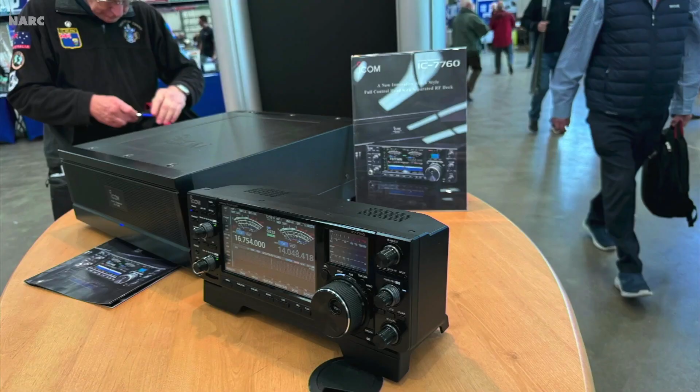And this was a radio that was there, which is one of a few launches there, but this was a major one. This is the IC-7760, which is ICOM's new flagship radio. It looks really nice. It's nearly £6,000, I think it's going to be. What was staggering, though, is this display unit near you is a remote head, so you can put that on your bench without taking much space. But that's fairly big. It's bigger than, say, an IC-705 or a 7300.

But look at the brute of the box next to it. That's got all of the radio gear in it. So it's let them have the freedom, I guess, to put loads and loads of electronics in. So if pounds per kilo of electronics is what you go by, it looks like you're going to get your money's worth there. But that was one of the brand new radios on show at the Hamfest.

And one other picture we'd like to show you. We didn't take this picture. And this is for Bob G7JTZ, on behalf of Paul G3VPT, because he's always having a go at him. And have a look at this. It just all got too much for some people, didn't it?

Oh dear. Is Bob not going to talk to us now? No, probably not. We had to show that picture, Bob, though, because you do send similar pictures of your friend Paul. And anyway, there's a picture of me taken the other day, a sneaky picture of me asleep, so why shouldn't you? Shouldn't just be me for that.

All right, Tammy, show us some little people.

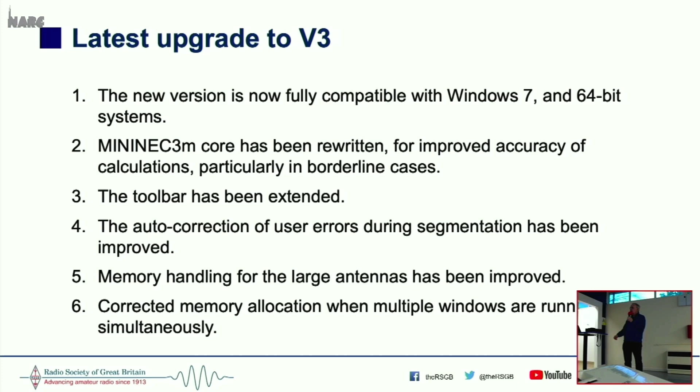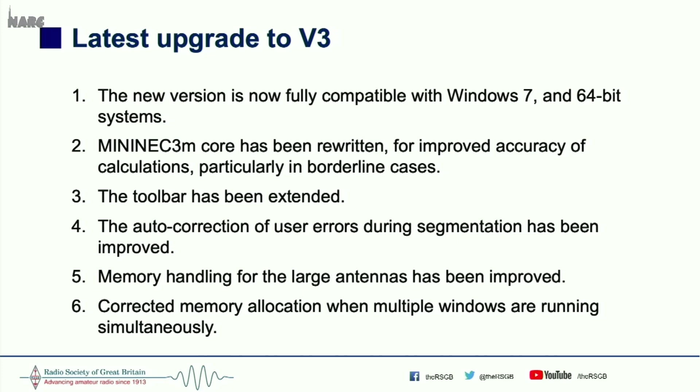As I said, the biggest change I noticed, I've been playing with it the last couple of days, is that you get color graphics of the radiation patterns, which are quite pretty. But there we go. Okay. So this is what's new. This is actually what's new in version 3.

So they've increased the number of segments. Now, what's the segments? Well, this works by breaking up the wires into little segments and then applying the RF to each segment, working out what the individual field is like from that segment, and then adding them all up. That's an easy way of saying what it does. It's a very complicated way of doing it, as we'll see in a minute.

But they've increased the number it can handle up to 10,000, which is way more than enough, and the number of wires. That is the number of elements to your antenna. They don't have to be wires. It could be aluminium if you want. That's been increased to 600.

And the number of sources. The source is like if you're applying your radio to a particular point, we call that a source. They've increased that to 100. I've never ever used more than one source, so quite why you need 100, I don't know, but there we go. And you can see the other elements that are in there as well. But it's an easy program to learn to use if you get your head around it.

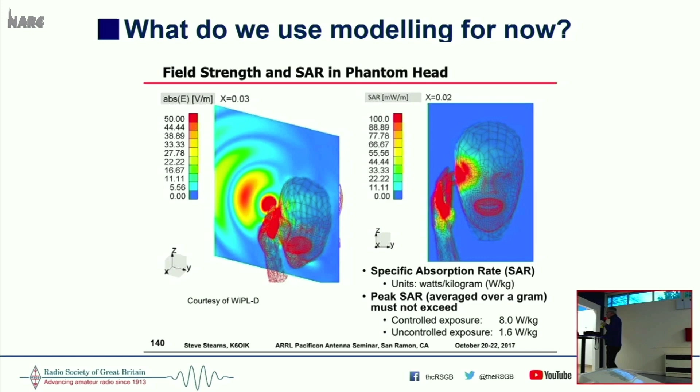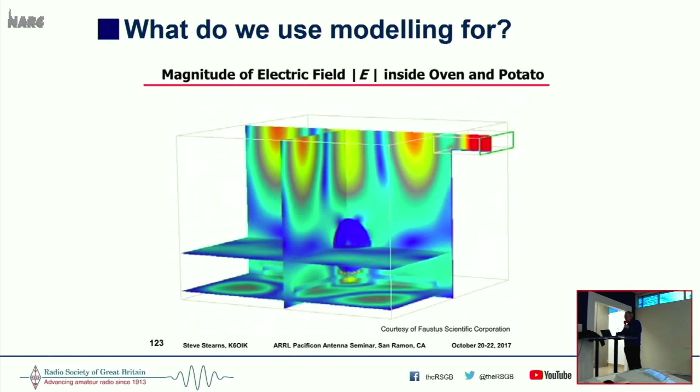Or you want a more practical example. This is the magnitude of the electric field inside a microwave oven with a potato. And so what did the modelling result in? Well, it found that the potato cooks unevenly, the bottom cooks faster than the top, and there's a centre hotspot due to focusing in the microwave. And you can see on the left-hand pattern there why your food doesn't cook evenly unless it's rotating, because you've got all these hotspots.

And if you don't believe me, break an egg into a microwave, then run it and see whether you get that kind of pattern. You probably will, unless you put it on a rotating dish. That was the trick for the microwave oven, to put a rotating plate in it. Otherwise, this is the sort of thing that happened. Anyway, we're not interested in microwave ovens. We're talking about antennas. So what do we need to know?

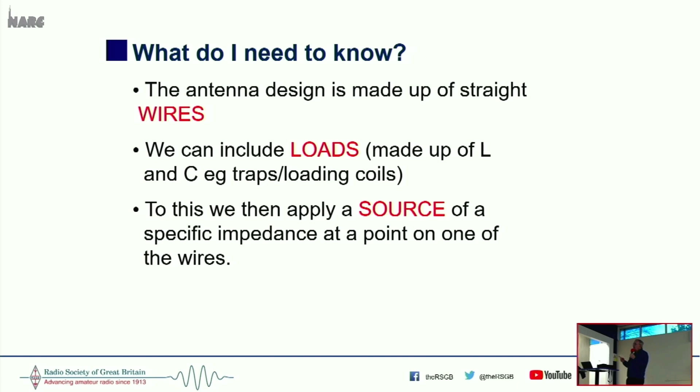Well, the three things you really need to know to deal with MMANA-GAL, just three things. That the antenna design is made up of straight wires. We use the term wires. They could be aluminium elements, but they're called wires. We also need to think about loads, which are traps, loading coils, made up of L and C components, so that's inductance and capacitance. And then we apply a source of a specific impedance at one point on one of the wires. So you need to know wires, loads, and source. They're the three things you need to know.

So then, if we move on to MMANA-GAL itself, we can see how that works. So this is a 20-meter dipole, and you'll see we've got wires at the top, source down on the left, and loads on the right. So in this particular instance, we've got no load being used, there's no coils or capacitors, and we've got just one wire, which goes from minus 5.17 meters to 5.17 meters. So it's 10 meters long, so it's a half-wave dipole on 20 meters.

And then the sources, see where it says pulse, it says W1C, that means wire 1 center. And this is the way we use it. We say W, then the wire, and then you can put beginning, center, or end. So W1B would be apply the source at the beginning of W1, wire 1. W1E would be put it at the end. But we've got W1C, which is put the source in the middle of wire 1. Okay, and you can see also there we've got a frequency that we're aiming at of 14.05 megahertz.

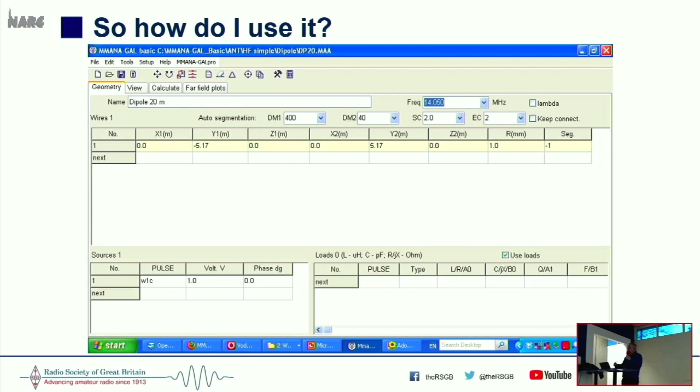Once you start to use this, it makes more sense. But this is why I think get it right from the outset, is that we use wires, and you can put as many wires as you want. And we have a source that we apply to the wires, and then capacitance and inductance, i.e. loads, we can also put that there as well.

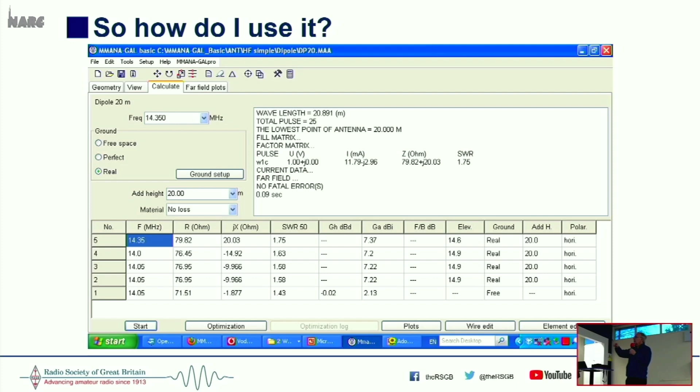And then you just press the start button, and it will come up with a line. Take the top one there, line number 5. Every time you press the start button, it will generate a new line. So if you go and make an adjustment to the antenna and press start, you'll get a new line. So you can see it's adjusted for 14.35 megahertz. We've got an SWR of 1.75 to 1. And it's at 20 meters. So, right, okay, that's good.

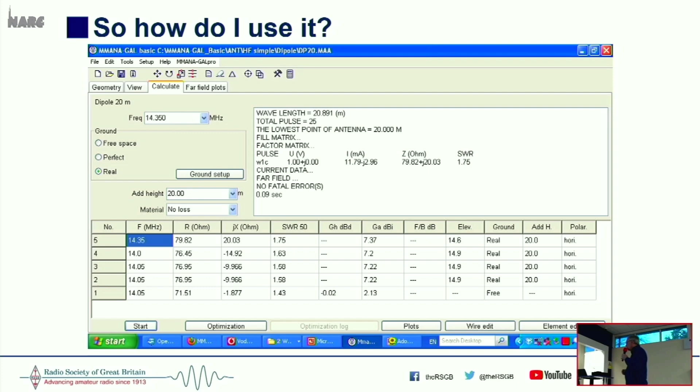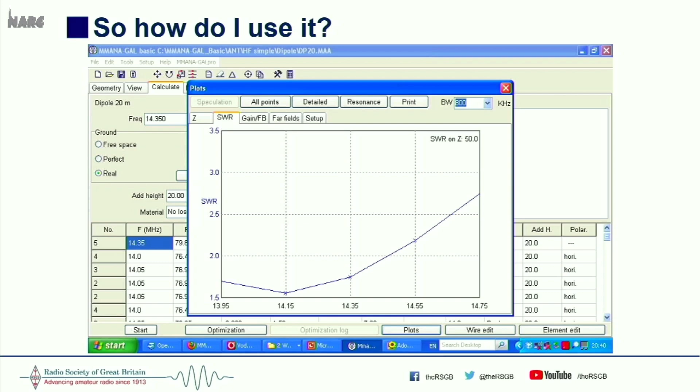So now we can go to the next tab, which is far field plots. Oh, no, before we go there, I just want to show you something else. You can actually then go to plots on that screen and say, right, just graph me the SWR plot or the impedance plot or the gain plot. And so you get the typical sort of SWR curve that you would expect to see. So you can see that the lowest SWR is at 14.15. So it's great. So we haven't had to cut any wire at all yet. We haven't had to go out in the rain. We haven't had to get freezing cold. We've done it all on a computer, which is good.

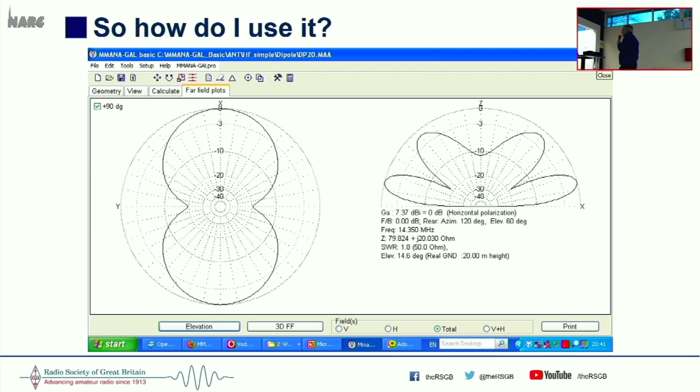And then we can go to the 3D view. And as I said, in version 3 now, this is in color, we'll see that later, but you can have a look at 3D, and you can rotate this around and have a look to see what you want. So you get a great idea of how this antenna is going to work before you even commit yourself to cutting wire. Oh, and you can adjust this so you can look at the vertical polarization elements, or the horizontal polarization elements, or you can look at the total field, which is what we're looking at there.

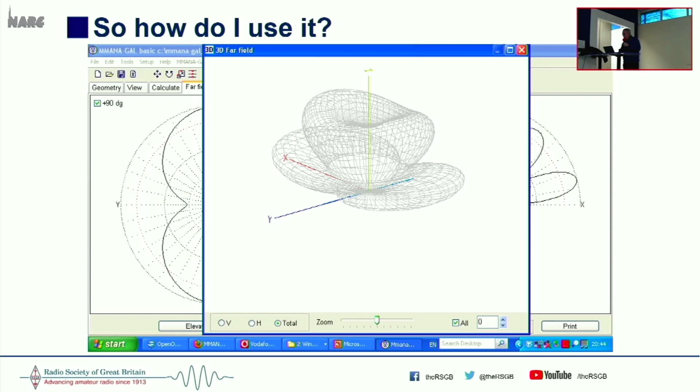So what about a typical example? Well, Roger, some time ago, had a rhombic antenna, a massive thing. I remember going to Roger's and saying, oh, it looks like your neighbours are hams as well. He said, no, that's my tower. It was just way, way over in the next field. I don't know if he's still got it, has he? No, I think it's taken down.

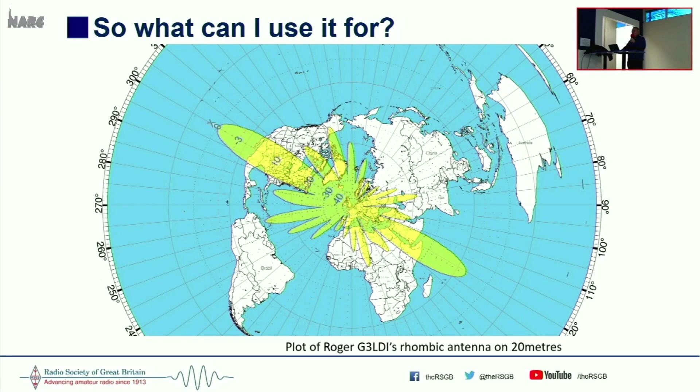So as a rhombic, excellent antenna, fantastic antenna, but only in two directions. Not very good for working Australia at all. Not for working New Zealand either. But if you want to work central US, it was absolutely fine. That's the sort of thing you can do with it. So let's have a look at some other antennas and see what MMANA-GAL tells us about them.

Now this is a G5RV. Does everyone know what a G5RV is? Yeah, very classic starter antenna really for HF. And everyone raves about them. Oh, I've got a G5RV, it's fantastic. Okay, well, what does this tell us? If you design and run a G5RV through MMANA-GAL, you find a few things. You see that it's got fairly low SWR on 20 meters, which is the band it's actually designed for. At 12 meters as well, it's below 3 to 1. If you look at 10 meters, it's 52 to 1.

And even on 10 megahertz, 30 meters, it's 34 to 1. So it's not really a multi-band antenna, not a particularly good one. And anyone who's played with G5RVs will know that they're not brilliant performers on some bands, and in some bands you're going to cause problems. I managed to burn an ATU out trying to run one of these on 10 meters once. Well, this shows you why.

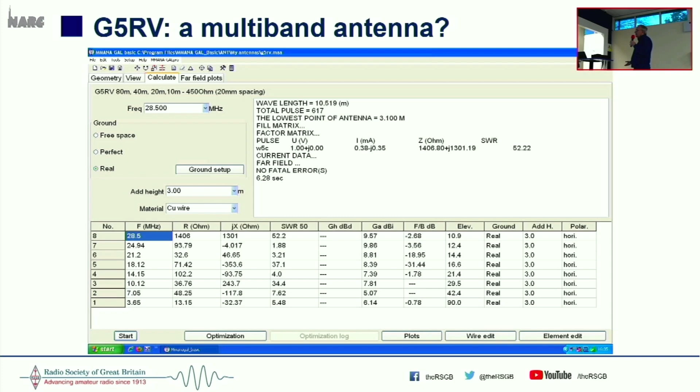But if you didn't model it and you just put the G5RV up, you'd never know. But this will let you play with things, as I said, before you actually start building them to see whether it works or not. And I think that the conclusion there is the G5RV is not really a very good multi-band antenna.

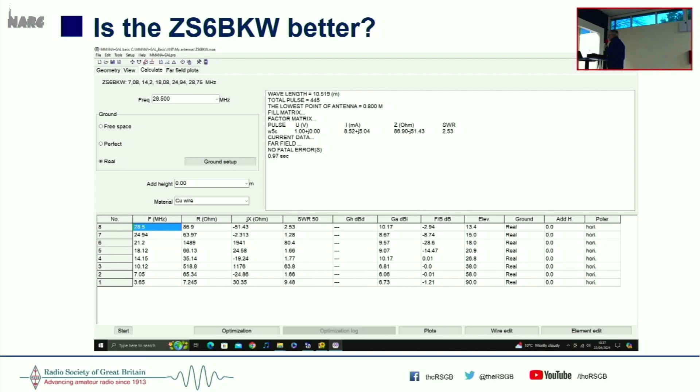So if we put that in a little table, you can see how they compare. So it's much better on 40, 20, 17, 12 and 10 meters. Better than a G5RV. And it's actually slightly shorter, but I think it's about another 15, 20 feet on the 300 ohm cable that goes to it. But there we go. That's MMANA-GAL and what you can do with it.

Right, what about the W3DZZ, which is a trap dipole? These are always being described as multi-band antennas, but in fact, if you do run them through MMANA-GAL, you find that you've got a low SWR on 80 and 40, which is what it's designed for. Low SWR on 15 meters, 2.4 to 1. But everywhere else, it's not good at all. 11.3 to 1 on 10 meters, 35 to 1 on, is that 28 megs? Yeah, 35 to 1 there. I think it's meant to say 24 megs actually. 14 megs is not brilliant. So again, it's not really a good multi-band antenna.

And I've played with this. I've tried different loading coils, different values of the capacitor in the loading coils, trying to find a combination that would give you low SWRs on all the bands, and basically gave up in the end. So the W3DZZ trap dipole works very well on 80 and 40, and then by design it kind of works quite well on 15 meters as well. But the rest of the bands, no, not good at all.

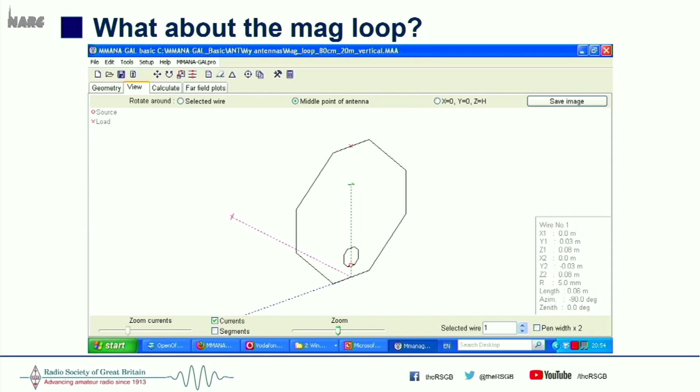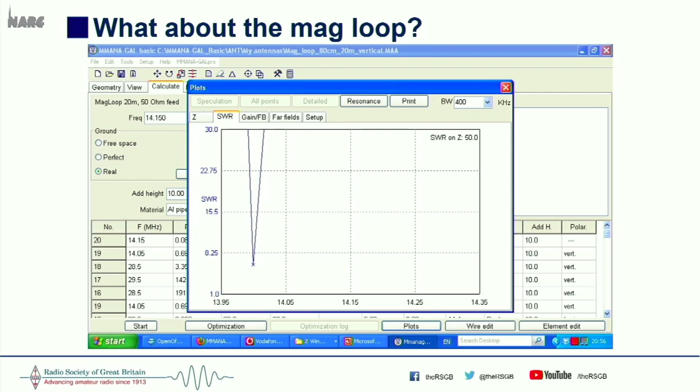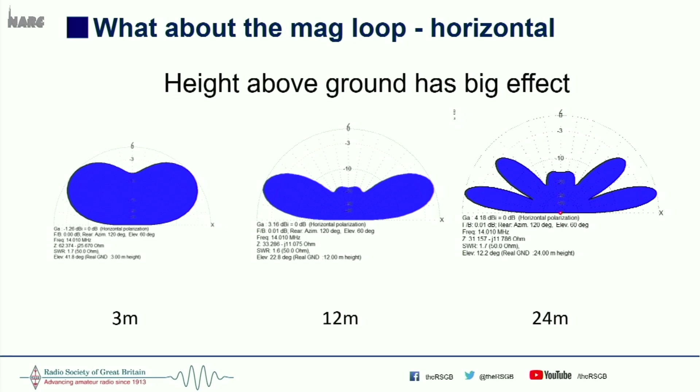It's not a good idea to have a magnetic loop horizontal unless you can get it at a fair height. And by fair height, I mean at least 10, 12 meters above ground. So again, we haven't had to do anything, but MMANA-GAL tells us that that's the case. So they recommend that with small magnetic loops you put them vertical. So what about if we have it vertical then?

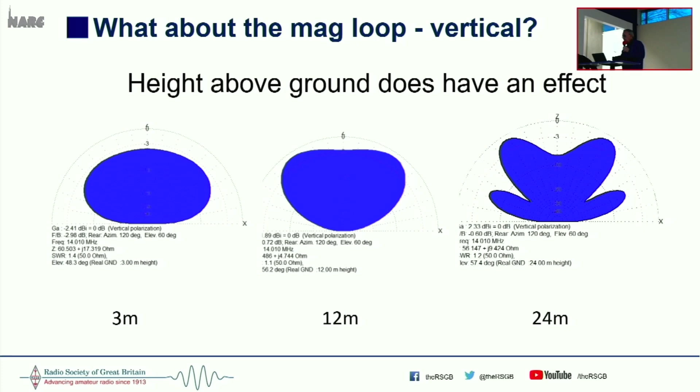I love it when you press a button and nothing works. There we go.

So this shows you what I did this week. This is in MMANA-GAL 3. So now we've got these coloured radiation patterns. You can see the hotter the colour, the more radiation there is coming off it. You can just about see the green loop in there. So the radiation on a magnetic loop is in line with the loop. It's not off the sides, it's in line with the loop.

So if you're going to have one of these, it's best to have it, if you can, on a rotator, so you can point it at where you want to work. Failing that, you've got to align the loop so that it's actually aligned with the country you want to work. And then you've got radiation in two directions, but off the side you don't get quite so much. So that's a magnetic loop, vertical rather than being horizontal.

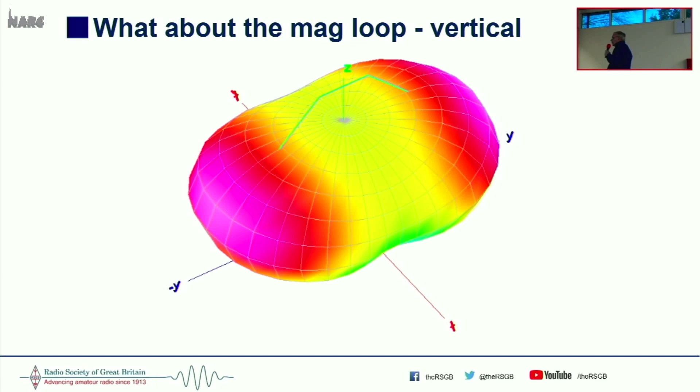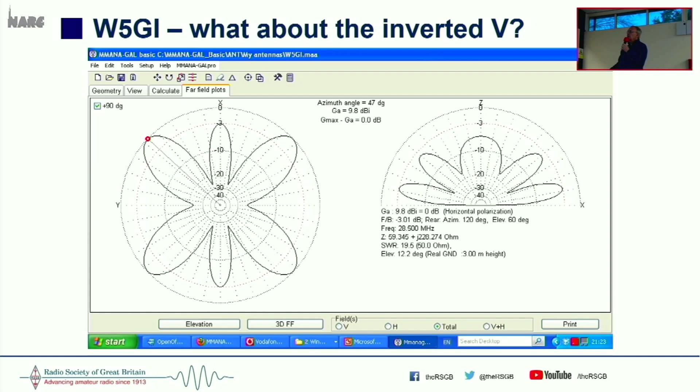Now, W5GI is what we're going to use at Caister on 40 meters on Saturday, and this is a plot of what a W5GI looks like if it's flat. But what about if you do it as an inverted V, which is the way we run it at Caister? Is that the sort of radiation pattern you get? Well, no, not really, because what happens is it squashes it down.

So instead of having that sort of butterfly type radiation pattern, you're now getting the black pattern, which isn't bad actually if you think about it. You're not getting those massive nulls. So if the station's in that null, you probably won't hear them, but now by making it an inverted V, you will. So looking at the pattern on the left, you can see the black area. It shows you that it's a much nicer pattern, more omnidirectional, if you like. There are no massive nulls there.

But if you look on the right-hand side, you can see that you're down probably about maybe 7 dBs on those bottom lobes there. But that's the trouble with antennas; they're all compromised. So what is it you want? Do you want the maximum radiation in certain directions, in which case don't put it up as an inverted V, put it up as a flat antenna, or do you want to put it up as an inverted V and have it as more omnidirectional, but you do lose some of the gain from the antenna.

So what's next? Microvert. This is an interesting little antenna. Has anyone come across the microvert? No? Google it. It's quite interesting. It's an antenna that's only about 1.5 feet long. It was designed by a German guy who has written all the instructions in German.

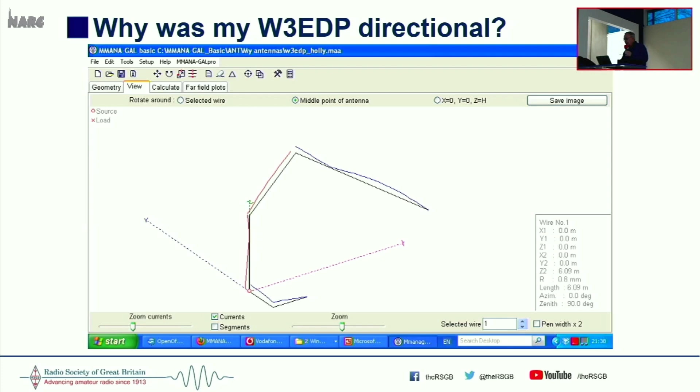But putting it in MMANA-GAL and playing with it shows you why. This is the radiation pattern for that W3EDP that I had. You'll see that there's quite a big radiation pattern to the south, southeast, southwest, and then a big null behind me to the north. And then there were a couple of little lobes out there to, what would it be, the northeast and northwest. But by far the biggest radiation for this antenna was to the southeast and southwest.

Also, it was pretty much a sky warmer as well. You can see this is on 20 meters, so not a terribly efficient antenna at all. It didn't last long before I took it down and tried something else. But this is what I mean. You can take your design and put it into this and go, oh right, that's not going to work. Or how do I have to arrange this antenna in my garden to work what I want to work?

Just because you've got two trees in the garden and you're going to string it between those two, fine, but you may find that your antenna doesn't work terribly well when you want to work America, say. You might be in a big null. So by doing this, you can at least see, right, okay, well that's not going to work, is it? So we have to play with it.

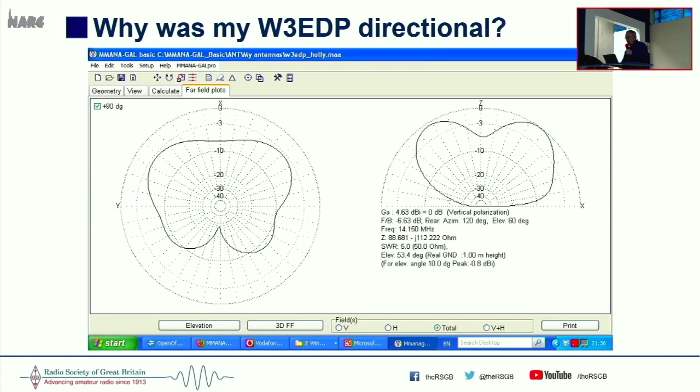And it's dead easy to put up, and that's one of the main reasons, because it'll probably be raining on Saturday. We've done it in rain, gales.

I don't think we've ever done it on a sunny day, have we? Well, we did, but oh yeah, I remember now. Yes, you got stuck in the... you don't want to be reminded of that. All right, the first time we did International Marconi Day, we had a problem. So you're going to use their flagpole. That was the arrangement. We're going to use the flagpole, so it's great. So he hooked it up to the flagpole, pulled the wire, and the flagpole broke in half because it was rotten. So, now what are we going to do?

So they had a cherry picker, didn't they? So David went up in the air on the cherry picker, and then what happened? I can't remember now. It stopped, didn't it? Yeah, it wouldn't come down again. So no. Yeah. They didn't have any sympathy, but Kevin was very quick to get his camera out and take pictures of it. So yeah, that is exactly what happened. And this was the first International Marconi Day we did. So great, we're going to use a flagpole, and that's just broken in half. And now we've got him up on the... So I did say we could hold the antenna above your head for the next 7 hours. You'll be fine.

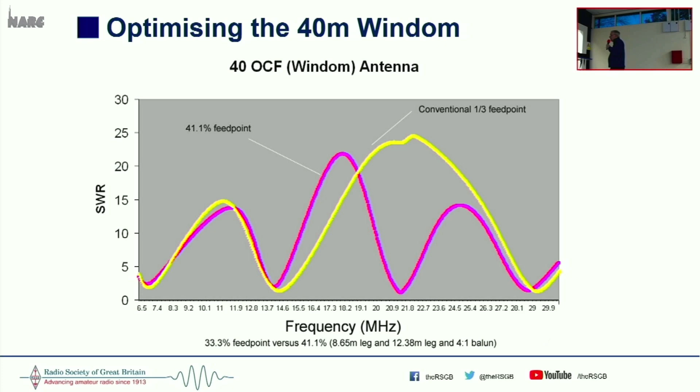So how could you change this antenna so that you can get more bands? Well, it's easy. You play with it on MMANA-GAL, and you find that if you feed it at the 41.1% feed point, now you've got it on 40, 20, 15, and 10. So by changing where you're feeding the off-center fed dipole, you can get more bands in. So that's another nice tip as well. That's worth knowing, because if you're building an antenna and you've only got room for one, by doing this, now you can go on 15 meters as well. So I think that's another good way of using an antenna analyzer.

And I did all the calculations, we worked it out, and we bought the 300 ohm ribbon cable. But when we put them all together, they were resonant on about 156 megahertz. And this is weird. I thought, well, why is that? Because I'd built some of them before. Originally we'd used the clear 300 ohm ribbon, with a translucent plastic. And then for the rest we bought some black stuff. Well, the velocity factor of that was totally different to the white stuff.

So it turns out that if you want to build one of these with white 300 ohm ribbon, then 59 inches is the length you need. But if you're using the black stuff, 53 inches is what you need. And likewise, the gap at the bottom, instead of 18 inches with the white 300 ohm ribbon, if you're using the black stuff, you use 16 inches. So again, you can play with these ideas to see what you can do, or how you adjust the thing to get it to work. So we ended up with these antennas that are on 156, and we had to, what did we do? Cut it longer or shorter? I can't remember now. To cut it to get it to 145 megs anyway, but there we go.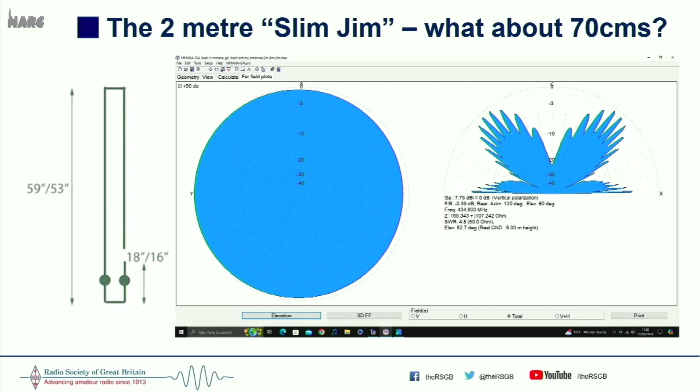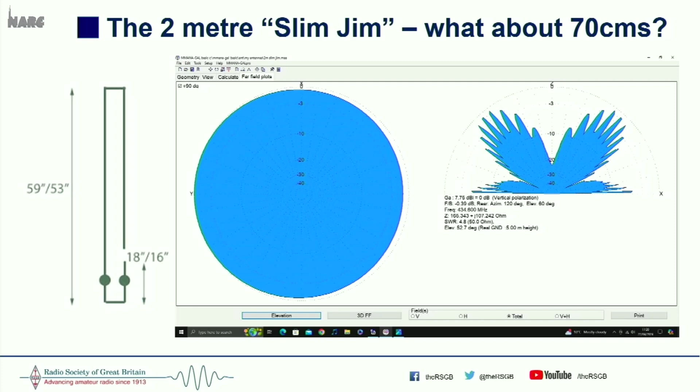So yes, with a 2 meter Slim Jim, you can use it on 70 centimeters. It won't be the most effective antenna in the world, because you are wasting some of your radiation going up and out of the way. Good if you're using satellites, I guess, but it will work on 70 centimeters. So one antenna means you can work on 2 bands, although don't expect miracles out of it, but it will work on 70 cms. And again, playing with this like this, you can actually play with it and go, oh, right, okay, that does work after all.

Right, so what are the pitfalls of using an antenna modeling program? Well, the software assumes your antenna has nothing around it. That is, if you've got, what should we say, metal greenhouses, well, not metal greenhouses, but metal framed greenhouses, that won't help. Loads of trees don't exactly help either. So it assumes you've got nothing around it, but of course, in real life, you do have things around it.

And if you've got too many antennas, Chris will tell you how you get interactions between them. You do. I remember we did a test one. Do you remember that? What was that damn thing we tried? Anyway, it didn't work terribly well, and we realised it's because there was an 80-metre dipole just above it, which screened it. Yep, we've tested so many things over the years.

Yeah. What about the earth conductivity and dielectric constant? Do you know what they are? It comes with some standard ones, but if you are on a beach, say, that will make a big difference. Salt water makes a massive difference. Salt water works very, very well, but I often read people saying, oh, I'm right next to the river, that will work better. Well, it doesn't actually. Fresh water is not that good, nowhere near as good as salt water. It's fantastic.

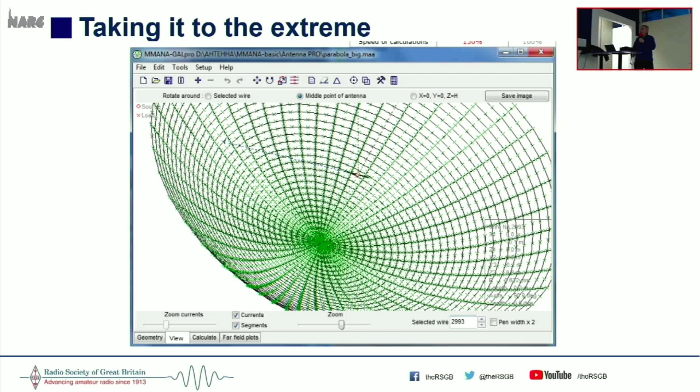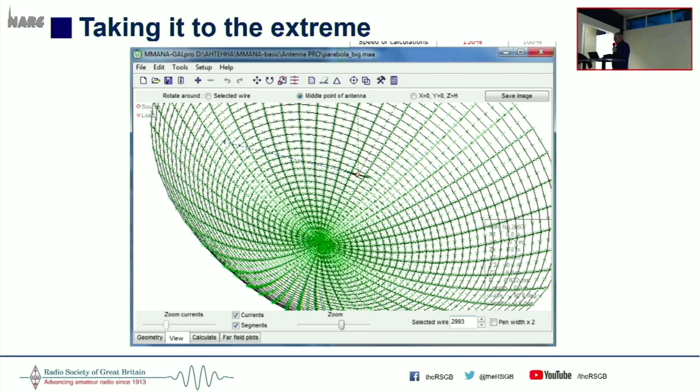This was a parabolic antenna that has been produced in MMANA-GAL Pro. I just dread to think about how long that took them to do that. But if that's the sort of thing you're trying to model, then yeah, you probably need a better program than MMANA-GAL Basic. But otherwise, MMANA-GAL itself is fine.

There's quick start tutorials on the web as well, and there are YouTube programs. I mean, the presentation I'm giving here, I've given this before. It's on YouTube as well. But DX Commander, you know, the guy who does the verticals, he has done a YouTube one on easy antenna modeling with MMANA-GAL.

A lot of people say to me, I just can't get my head around how to use it. Just break it down, start off with something simple like a dipole, and then work on that from there, and get to know how it works, and then you can start adding more elements to it or trying to work with beams. But there we go. And there are many more tutorials. If you just search for MMANA-GAL on the web, you'll find all sorts of things.

And then just penultimately now, just one thing. It's only a model. So no one got DXCC using MMANA-GAL. So, you know, you can model your antennas till you're blue in the face, but until you actually build them, you won't know how well they really work for you.

But I think it's a good tool to use. It's a good tool to get to know how to use, so you can at least play with it and see how things will work. If you've got a specific sized garden, you know, what's the best antenna for working America from my garden? Well, it may not be the one you think it is, but there we go.

They're all there. So, as I said, Google G0KYA, it's the Blogspot site. Just look on there and go to MMANA-GAL, and you'll find a link to download them as a zip file with about 20, I think, antenna definition files that you can play with.

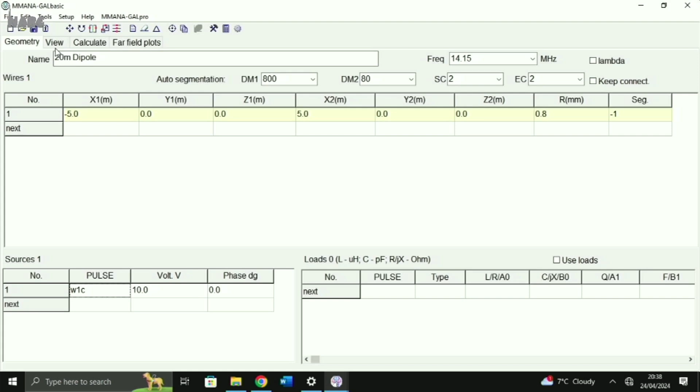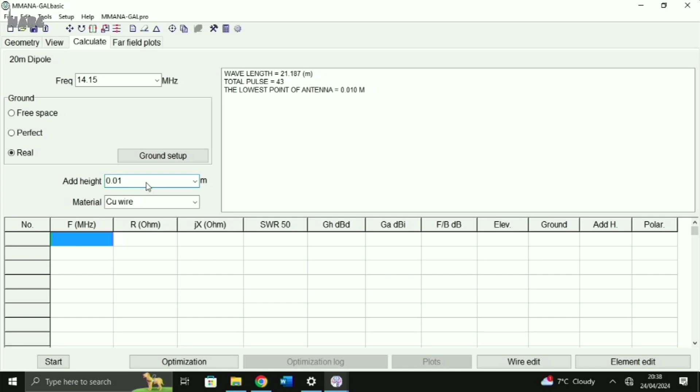So let's have a look what we've done. So there it is, and so you can see we've got the feed point, the source, as it were, in the middle, and you can rotate this around. So good. Let's have a look at calculate now. So material, we're going to make copper wire. There we go. And I'm going to put it at 10 meters. Good. And then run it. So there we go. We've got a 20 meter dipole, which I've only cut to 10 meters long, with an SWR of just under 3:1.

So if we look at plots now, say, okay, show me the SWR plot, details. There we go. So we can see that the antenna is actually resonant above 14 megs. So it's too short. Okay. So somebody was saying earlier, how can you use the optimization? Well, okay, let's have a look. So optimization, you basically decide what it is you're trying to optimize. So we want a lower SWR.

So I'm going to put that as one of our, just got to put the mic down actually. We're going to put that as the thing we want to do. Hold on. There we go. So the SWR is what we're trying to optimize. I'm not too bothered about the gain, front to back, or the elevation. So let's knock those down. Okay, and right. And we're going to do it on wire 1, which is, we have only got one wire, so that's it.

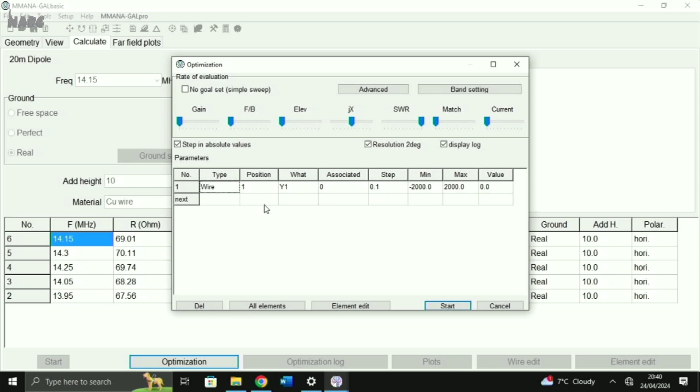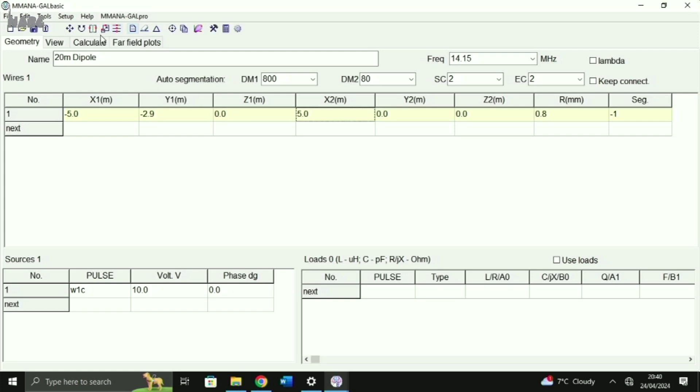So right, start. So now it will go away and it will play until it actually gets the lowest SWR it can on 14.15. So if we now look at the thing, you'll see that it's now, what is it now? It's now at 2.9. That shouldn't be like that. Okay. Let's have a look at the plots now. Detailed. There we go. So now you can see that that's the SWR plot we want. And so it's optimized it for SWR.

We can optimize for gain, you can optimize for impedance, you can optimize for what you want. Not the easiest way to do it, but it saves playing with a calculator. But obviously, if you were building this for home, out of PVC covered wire, I would take this length that it's calculated and I would multiply it by 0.95 to make it slightly shorter, and you'll find that that will probably be it, because it doesn't know that PVC coated wire has a lower velocity factor than copper wire.

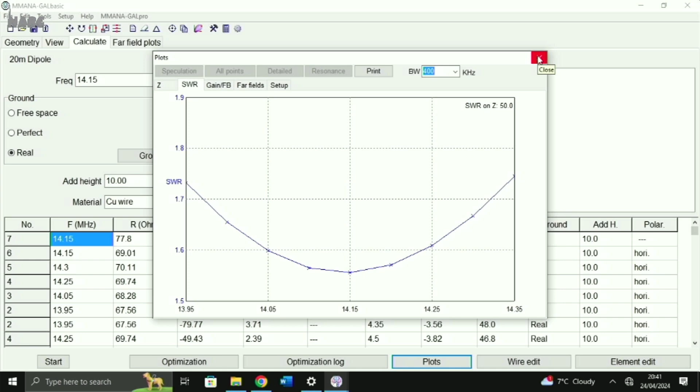But the more modern and more expensive versions of MMANA can do it, but it's not too bad if you just remember from the outset that that's the way you have to do it. So that's how you can optimize something. But it's got its limitations.

If you've got a 4-element beam and you want to optimize that for SWR, and you say, right, optimize element 1, element 2, element 3, element 4. So it can adjust the lengths of the beam and it can adjust the inter-element spacing. That's a lot of work to do. So maybe you'll find it will churn around forever and may not give you the right results. So I think optimization is best used for simple antennas, but anything more complex than that, you probably go around in circles trying to get it.

We tried this once. Roger wanted to know how we could get a better signal out for the 80-meter club championship. So we were looking at reflectors under the dipole, and worked out eventually that something about a foot off the ground and longer than the dipole would do it. But I don't think we ever tried it, to be honest, but it was the only way we could get it to have maximum gain or increase the gain in a north, skyward direction. So that's a basic antenna, a 20-meter dipole.

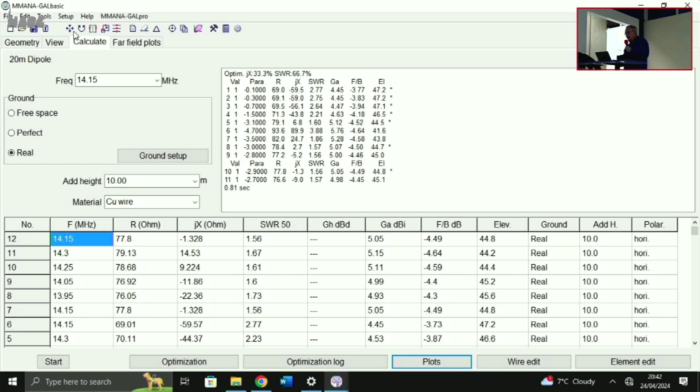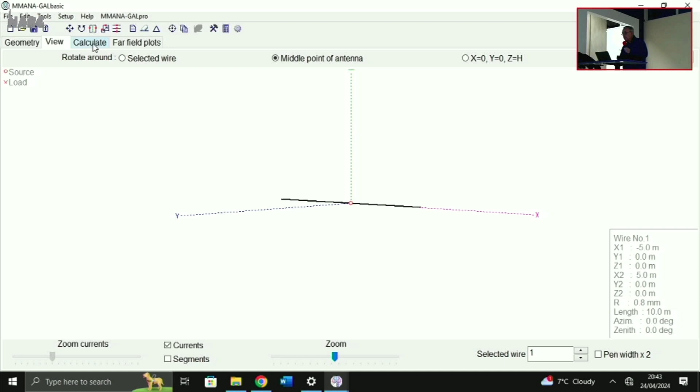So, let's have a look at the far field plots then. What do we see? There we go. So, at that kind of height, you'll see that. I'm just going to adjust this a bit because I don't think that should be 0. Silly thing. That's it. All right, run it. Yeah, hang on. Well, this is at 10 meters. So you'll notice that we've got quite a high lobe there, not terribly good. And this is 10 meters with real earth underneath it. So we're going to put it up to 20 meters now. And run it.

Interesting. So you'll see that if the antenna is running across there, its maximum radiation is still broadside to the antenna, absolutely. But not the sort of polar pattern you expected, I don't think, is it? Let's have a look in 3D, see what it looks like. So there we go. So this 20-meter dipole at 20 meters, you actually get 2 lobes coming out. So you've got a low angle lobe and you've got a high angle lobe as well. Probably didn't expect that, did you?

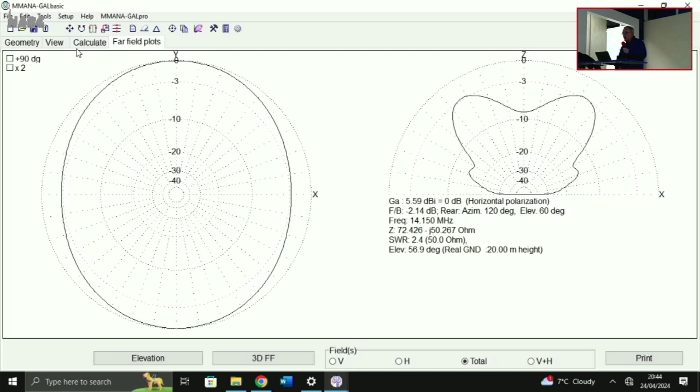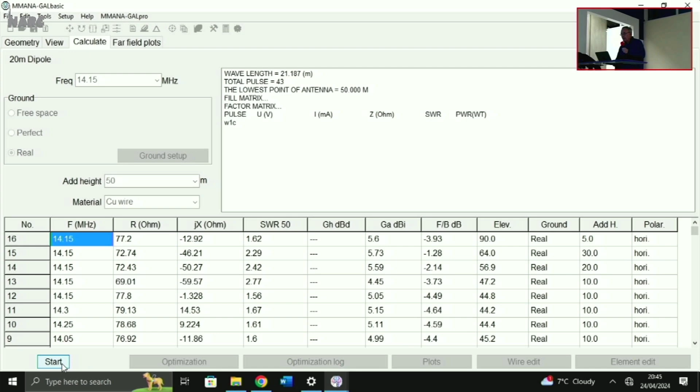Okay, so let's put it up higher, even more. Calculate. 30 meters, so we're getting up there now. Start. All right, far field. Oh, well, worse, yeah, great. Okay, let's put it down to 5 meters then. So it's a sky warmer now. So you can play with this to your heart's content. 50 meters. It's a lot easier than buying a house and a tower, I tell you. Right. Yeah, interesting, isn't it? So yeah, we can model anything.

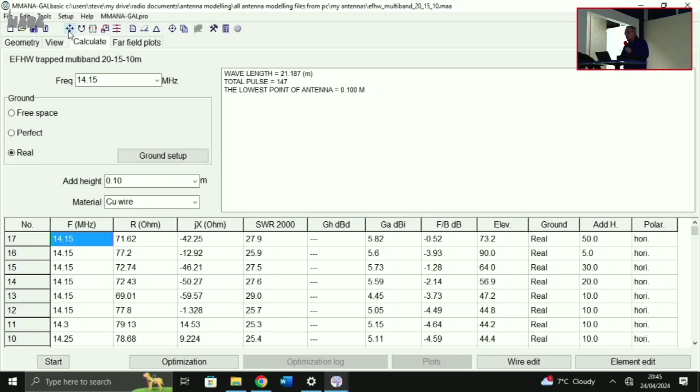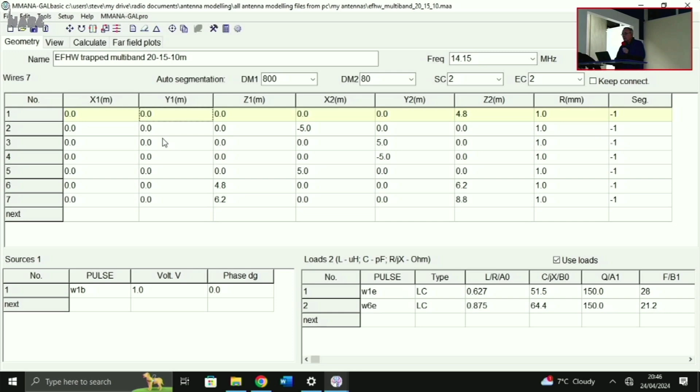So what have we got here? Something I've been playing with is an end-fed half-wave multiband. So this is an antenna with 2 traps in it. Now the traps are fairly easy to put in. You see we've got wire 1 at the end. We've got an LC trap there. So we've got 0.627, I think it's microhenries, and a 51 picofarad capacitor. So it's a trap with an LC element to it. And then we've got another trap on wire 6. So we end up with a vertical with 2 traps in it.

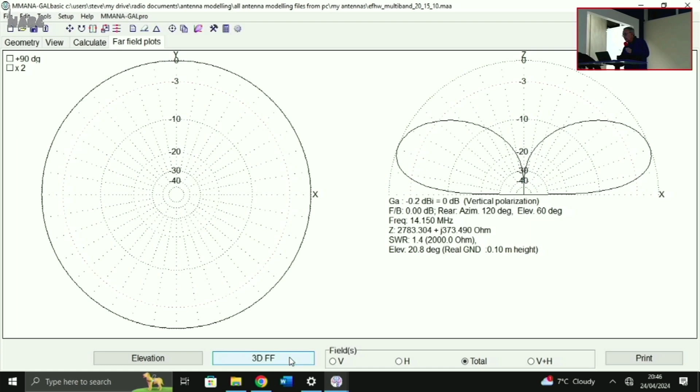And so we can play with that now, and there we go. Let's run it on 20 meters. So there we go. That's the sort of plot you get. So again, omnidirectional and fairly low radiation angle. There we are. So that's for 20 meters, and if we do it for 15 and 10, we get similar patterns. The only problem with this antenna design, and we may use it on Saturday, I'll see, is that unfortunately, if you have an antenna that's got a trap there and a trap there, obviously if we're running this on 20 meters, maximum radiation is right in the middle of that.

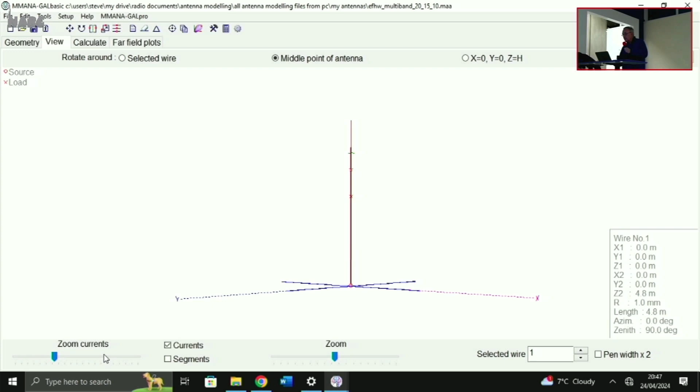Let's run it now, I'll show you. Maximum radiation is right where that trap is. I'll just put the currents up so you can see. There we go. So you can see the maximum radiation point is right where the trap is for 10 meters. So this is why it doesn't work terribly well on 10, I don't think.

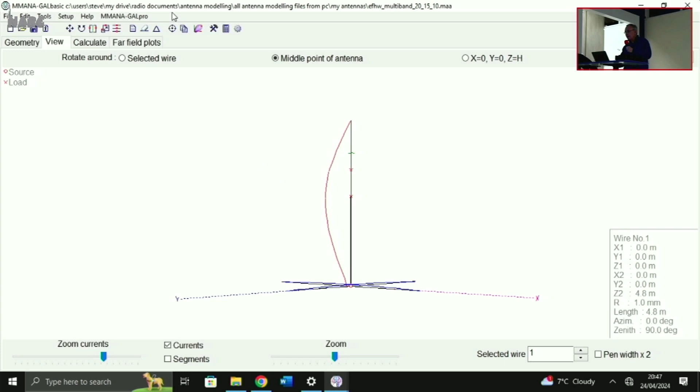But again, you can play with this and you start to see you can build a 3-band end-fed half-wave trapped vertical, but you've got to bear in mind what I just said, that a lot of the current is going to be in that trap. So it doesn't really help. But you do end up with an omnidirectional antenna with fairly low angle radiation. And I haven't had to build anything, so there we go. Yes?

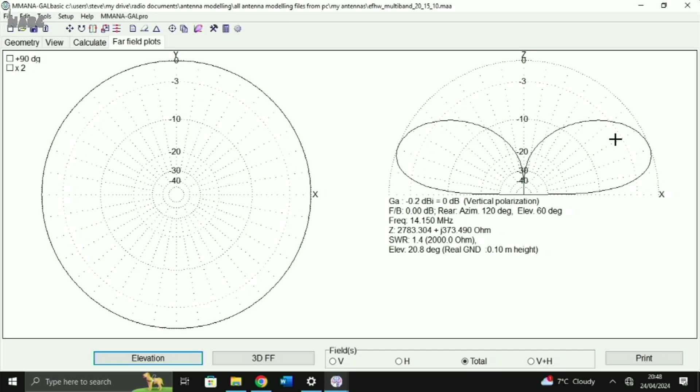I'm going to poke holes in it. The 10-metre trap at 20 metres ought to be almost invisible. You think so? Yeah. Well, that'd just be a little bit of a coil, wouldn't it? I mean, it'll be a coil, and at 10 metres it should be basically an open circuit. So all your current will be at the bottom. That's the problem with it. Well, because it'll only be a 2.5 metre tall antenna at the ground, won't it, at 10 metres?

No, we're not talking about quarter waves. We're talking about half waves. All right, half wave, it'll be 5 metres tall. Yeah, and there's the maximum current. That's on 20 metres, and there's the 10 metre trap, yes. So that should be almost invisible to the 20 metre signal, shouldn't it? I don't think so, if you think about it. Well, that's the whole point of it, isn't it?

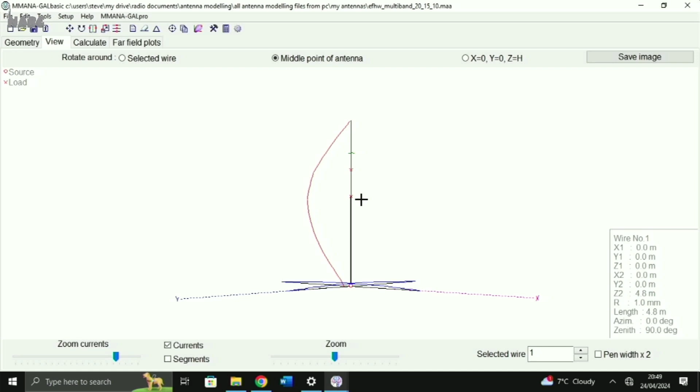Yeah, it's supposed to have very low impedance at 20 metres. Yeah, but it's still current going through a coil. Oh, there is current going through it. So it's current going through a coil. Well, that's why you got that little kink in the... Yeah, I think I can see a kink. Should have brought my glasses. Anyway, so if you do the plot for 10 metres, that should stop there, shouldn't it? Yeah, 10 metres isn't so bad, but it's just not very far off the ground. There we go. 28.5.

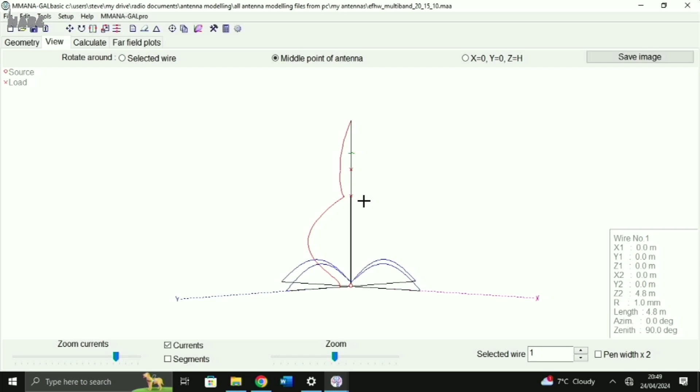As I said, I will probably bring this on Saturday, but we won't use it on 20 metres because I find in reality... Whoops, hang on. There we go. You can see there is some bypass up through the trap, but it still gives you a low SWR. But I found comparing it with a full-size end-fed half-wave that it's down a couple of S points, and I think it's because of the current in the trap. What, you just think the trap is a bit lossy?

Yeah. Will it handle 200 watts, Steve? I don't know. We'll find out. I think it will. These traps are designed for 400 watts, so they will take it. The matching box might not, but we'll see. But if Andy melts it, we'll know. Right.